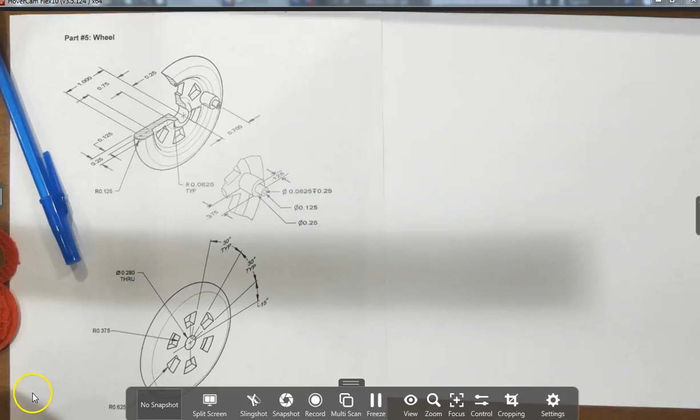Okay, this is going to be a general strategy video for making this wheel from the train. The first thing that I would do is get this profile right here. They've done this section view where you can see this profile and revolve it.

So understanding that sketch a little bit, it looks like you're going to have a rectangle that's going to come down. You could use the line tool and dimension, get the general shape, dimension it. You do have these dimensions out here, if you think of like lengths and widths, you have that.

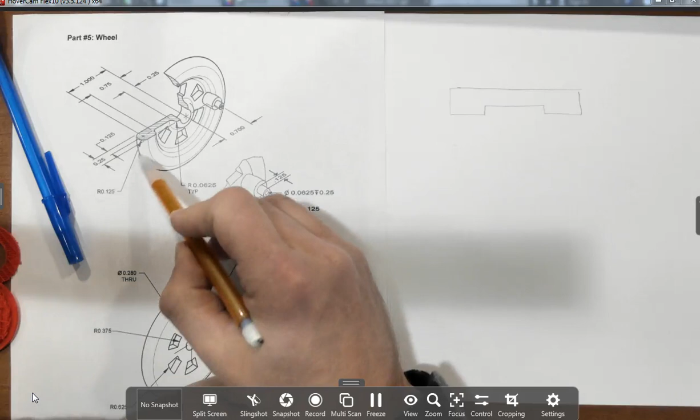And then I see rounded corners. I do see a radius of 0.125 on the end. Otherwise, I see all these little rounded corners, and I see a radius of 0.0625, 1/16 typical.

So I would make the ends here, you're going to come back and fill it, fill it, fill it, fill it. These are going to be the 1/16. These will be the 1/8. And then this is going to be your axis of rotation.

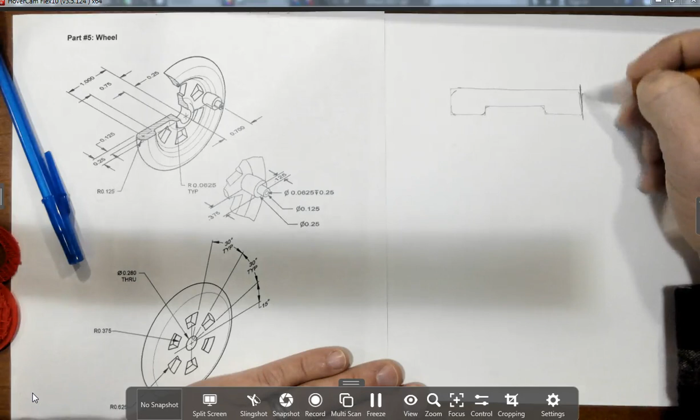Okay, you're going to revolve that. It'll be a solid piece. There won't be a hole in the middle like you have showing here. We'll get to that later. But I would make this rectangle extend basically all the way to here for now, because that's where they've dimensioned you to. Alright, that'll produce a wheel.

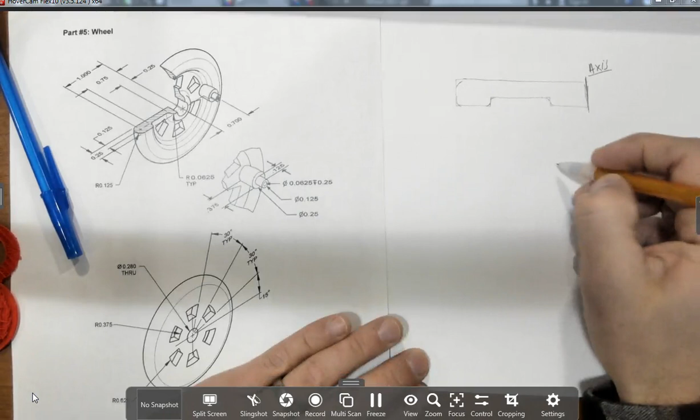Something round. You'll have some contours to it, right?

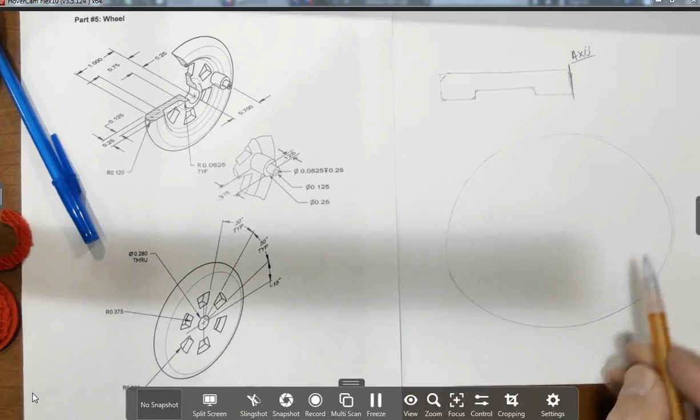Let's just imagine we're looking at the back side for a second, and one sketch you can do is just a point at the middle, and then use the hole tool to make the hole in the middle. And they show right here the diameter of this through hole is just more than 1/4 inch, 0.28 diameter. So you can do that, make a point, and then make a through hole with a 0.28 inch diameter.

Okay, next we've got this cut out. Save some weight, also looks very nice. And so we're going to create that geometry one time, and then we'll extrude cut it once, and then we'll circular pattern it.

Okay, so to do that, if we're looking at it, it looks like this one is kind of straight up, and they're just giving us some typical degrees. So the width of this in degrees is 30 degrees. The spacing between them is 30 degrees.

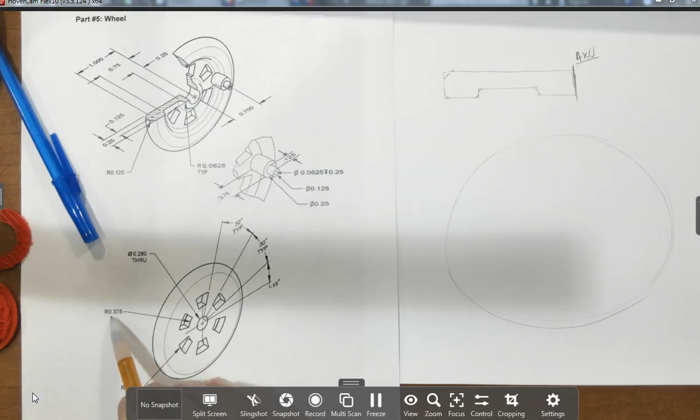Now the tops and the bottoms of those are arcs, they're not circles. And you can see leader lines here giving you the radius of the outer circle is 0.625. That's a radius, not a diameter. And then the inner one is a radius of 0.375. So you're going to double those radii to get diameters.

Basically, you're going to make 2 circles. And then from the center, you want to go make a line out to here and out to here. It's going to dimension it. You're going to be able to give degrees. You've got the y-axis running through here. And so you can set that to be a 15-degree arc or angle for that, and you can set a 15-degree angle for making this one. And that'll make a total of 30 degrees.

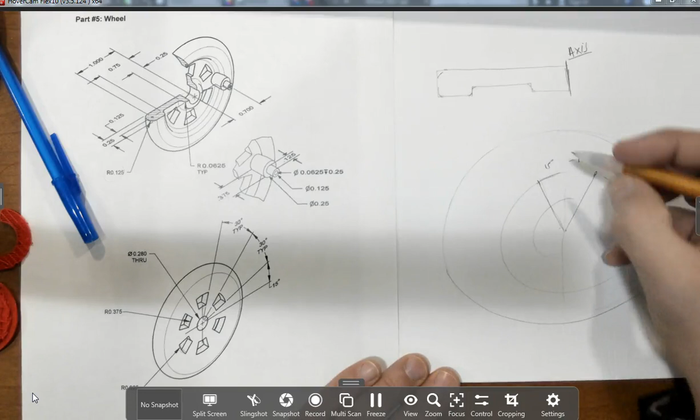Okay, after that, I would actually use my segment tool and come back and make a segment from here to here, from here to here, on top of those circles. I would then make an arc, use the 3-point arc, where you can specify the ends, and then the middle point you want to just get a constraint onto this circle. So use a 3-point arc here and here.

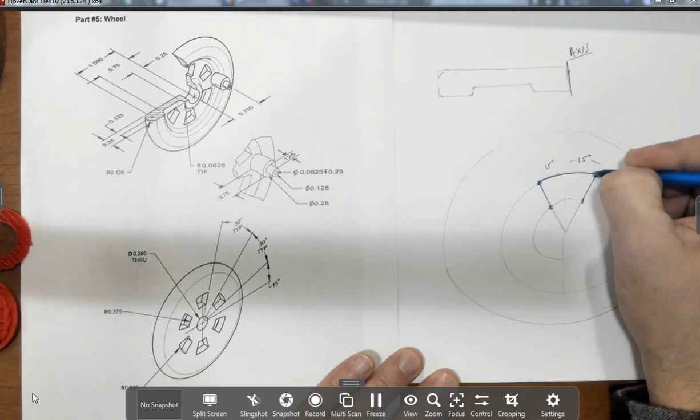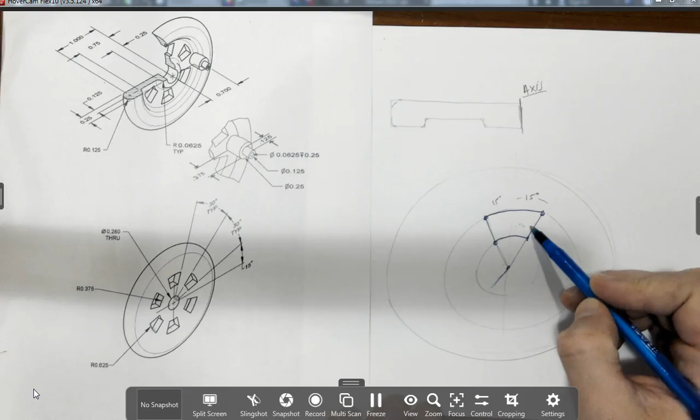After getting that 3-point arc here and here, you've got your profile. You can extrude cut it, and then in the 3D view, you'll have to get an axis that goes through a cylindrical object, through a circle. So you'll create a work axis that goes through the middle in the 3D view, and then you can circular pattern this 3D feature around that axis 6 times. They'll be evenly spaced, it'll look perfect.

Your wheel's really looking like a wheel, but there's another detail here in the drawing, and this is where the linkage arm connects. If you look at a train, the two wheels, I have a picture right here.

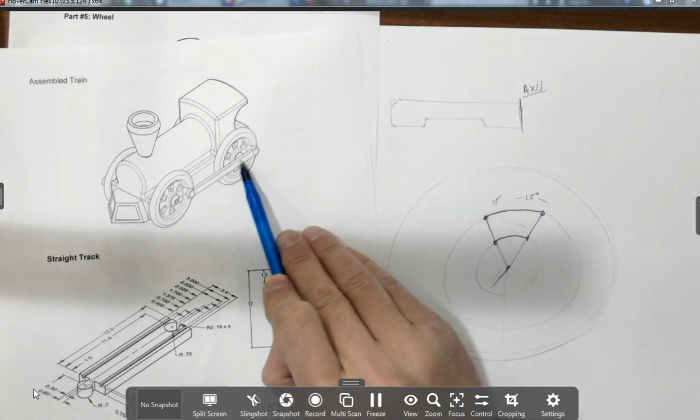Okay, so go back to the train. This right here is the linkage arm, and the linkage arm is going to connect to the wheel, keeping those wheels moving together. And so we've got to create that.

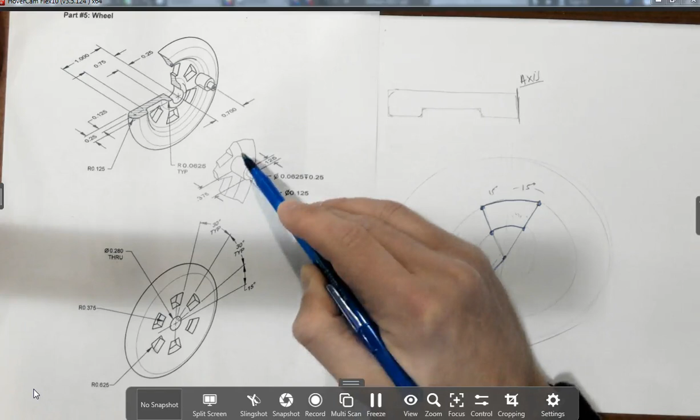Now this circle, it's a little hard to tell, but it overlaps. It's not just sitting on that flat surface of the wheel, it actually is over the curved area of the wheel. So that's kind of awkward to make and extrude. So what we're going to do is we're not going to start on the surface of the wheel, we're going to start out on a work plane. So basically you want to create a work plane that's out away from that surface.

So you're going to do an offset work plane by this much. Right here they're giving you the distance to offset to get to that surface. You can see that's going to that circle right here. Okay, so we're going to use your work plane command and do an offset work plane by 3/8 of an inch, bring it out, that's 0.375.

There you will create this circle, and you will extrude it back to that. But when you choose distance, we're not going to do a set distance, you're going to say to next. So look for the drop down where you can say the distance and change it to next. The extrusion will then go until it runs into stuff.

So this side, the outer side, will run into the curved wheel first, and it'll stop extruding. It'll just mate up with that perfectly, that profile. And on this side, it'll go all the way to the flat surface. So it's going to perfectly just extrude until it blends into the wheel.

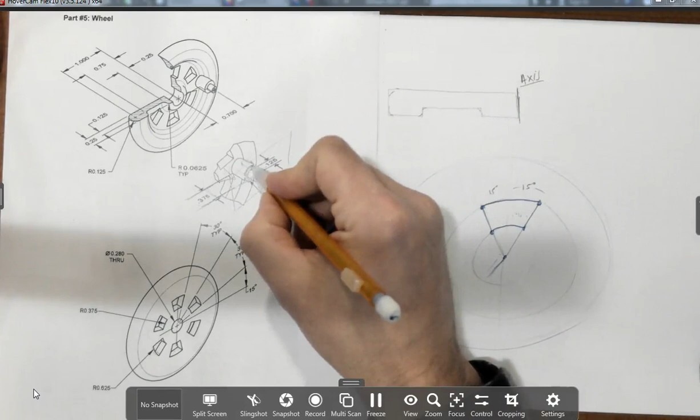At that point, you can start a new sketch on the face of that cylinder, and you can extrude out this big cylinder. Don't do the hole yet though, because if we look at the detail here, the dimensions that they've given us, we can see that this is going to come out 1/8 of an inch, 0.125. So that's the length of this, but the little hole inside there, you get a diameter. The depth of that hole is even deeper. So no need to make the hole yet.

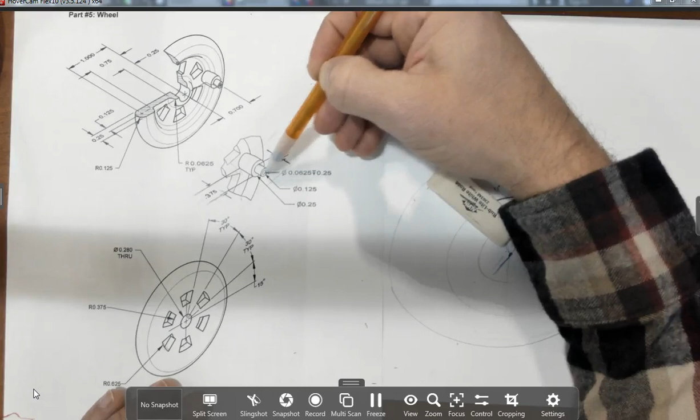We're going to come back and add a point and create a hole that runs deeper. It'll extend into this part, so that little hole actually goes deeper. So you might as well just wait. Okay, so pretty simple: new sketch, make a circle, extrude it out this 1/8 of an inch, finish sketch, finish extrusion, you're good.

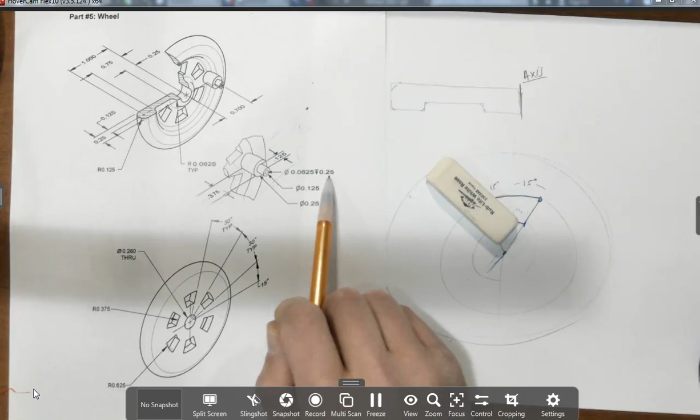Start a new sketch on here, make only a point, then finish sketch, use the hole tool to set the hole. It's just a regular hole, they don't give us any threaded details or anything here, so just a simple hole with a diameter of 0.0625, that's 1/16 of an inch, and a depth of 0.25, a quarter inch deep. And you've got it. All right, good job.